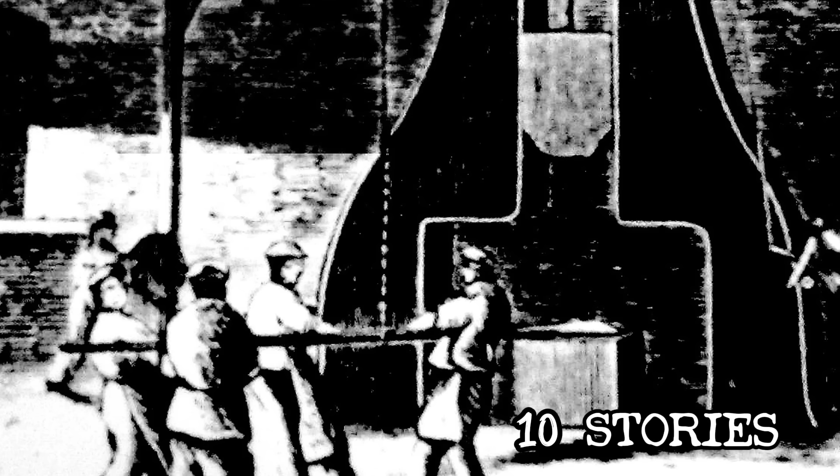Picture a piece of iron the size of a tree trunk, glowing the color of a sunset, lowered onto an anvil the size of a house. Above it, suspended on rails 10 stories tall, hangs a block of solid iron, weighing as much as 6 elephants. A man pulls a lever, the block falls, and for one violent instant, the ground itself flinches.

Nobody inside that building even looks up. It happens too many times an hour to register as anything unusual anymore. Somewhere nearby, a woman is hanging laundry on a line 2 streets from the forge wall. She doesn't look up either when the ground thumps under her feet. She stopped flinching years ago.

Her husband is the one standing inside that building, close enough to the anvil to feel the heat coming off the metal before it even glows. Neither of them would call this normal, exactly. But it's their normal. It's the only normal this town has ever known.

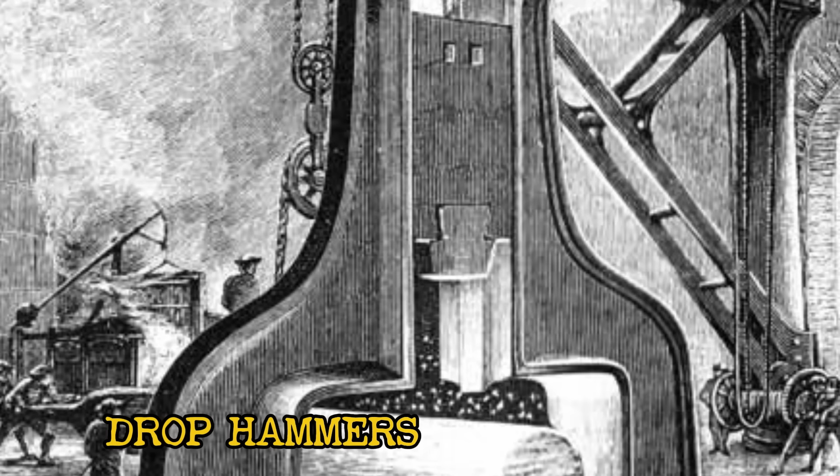For nearly 200 years, machines like this one shaped the steel skeleton of the modern world. The axles under your trains, the crankshafts in your ships, the barrels of your cannons. They were called drop hammers, and they were every bit as dangerous as they sound. This is the story of the men who stood beside that falling iron, day after day, year after year.

Some of them went deaf before they turned 30. Some of them breathed in dust that scarred their lungs for the rest of their lives. Some of them never came home at all. And in towns built around these forges, the ground shook so often that people stopped noticing, until their houses started cracking. It built the modern world.

It is also, quite literally, still rotting men's lungs and ears, in forge buildings that, in some cases, are still running today. Before we're done, you'll understand exactly what that cost looked like, and why so many men paid it without ever being told the price.

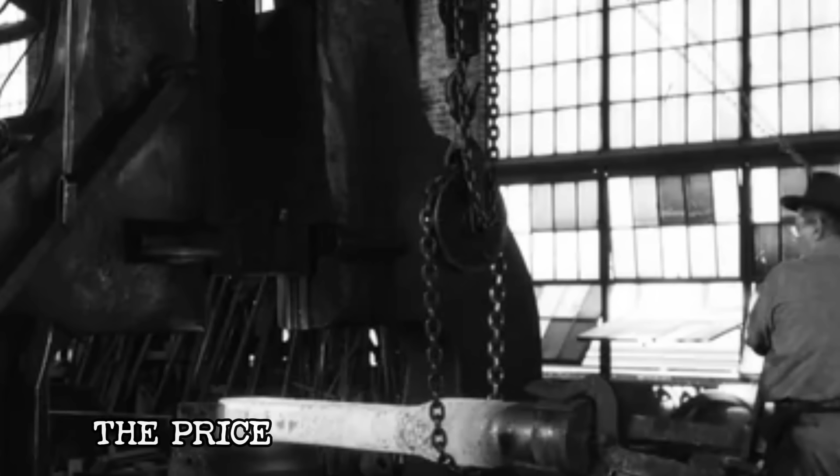Here is the question we're chasing. How did a single falling weight become one of the most dangerous, most essential, and most quietly devastating machines in industrial history? And why are people still paying for it?

We're not just talking about the men who stood next to it either. We're talking about entire towns. Entire neighborhoods built within earshot of a machine that never asked permission to shake their foundations. Keep that in mind as we go, because the damage in this story spreads a lot farther than the factory walls.

To answer that, we have to go back to a problem that nearly stopped the entire industrial revolution in its tracks. By the late 1830s, engineers had a crisis on their hands. Ships were getting bigger, locomotives were getting heavier, and every one of them needed a single piece of metal that nobody on Earth could make: a paddle shaft, a crankshaft, an axle forged from one solid mass of iron, sometimes 30 inches thick.

The old method was a sledgehammer crew, 10, 20 men, swinging by hand, in shifts, for hours, trying to beat a glowing slab of iron into shape before it cooled past working temperature. It was slow, it was inconsistent, and for anything truly massive, it simply did not work. The iron cooled faster than men could hammer it. That was the antagonist, a wall of physics that human muscle could not punch through.

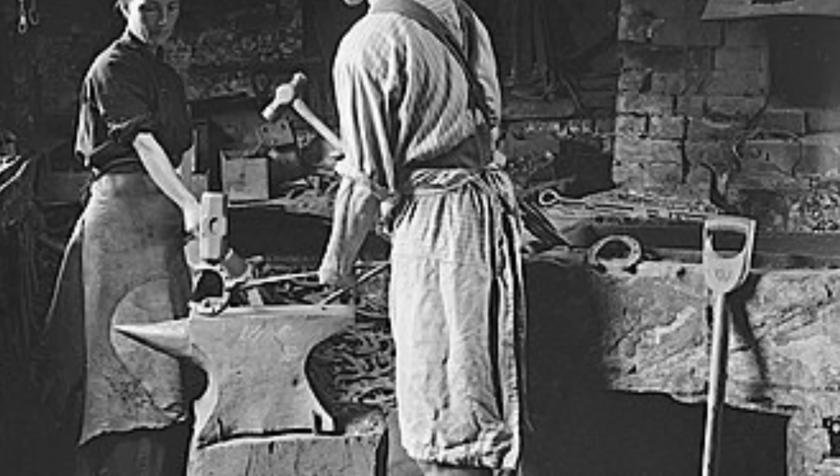Think about what that actually looked like on a foundry floor before this machine existed. A glowing slab of iron, pulled from the furnace, had only a narrow window of time before it cooled too much to shape. During that window, a crew of men swung sledgehammers in rotation, as hard and as fast as they could, racing the clock against the iron's own temperature.

Miss that window, and the entire piece went back into the furnace to be reheated, wasting fuel, wasting hours, wasting money. For a modest axle or a simple tool, that was merely inconvenient. For the kind of massive forgings the new steamships and railways needed, it was nearly impossible.

No crew of men, no matter how strong or well coordinated, could deliver consistent, controlled force to a piece of metal that size before it cooled past working temperature. The bigger the project got, the more obvious it became that human muscle had reached its ceiling.

A Scottish engineer named James Nasmyth ran into that wall directly in 1839. He needed to forge an enormous paddle shaft for a new steamship, and no hammer crew alive could do it. So he sketched something nobody had quite built before: a heavy iron block, lifted by a steam-powered piston, then released to fall under nothing but gravity and engineered weight, straight down onto the workpiece.

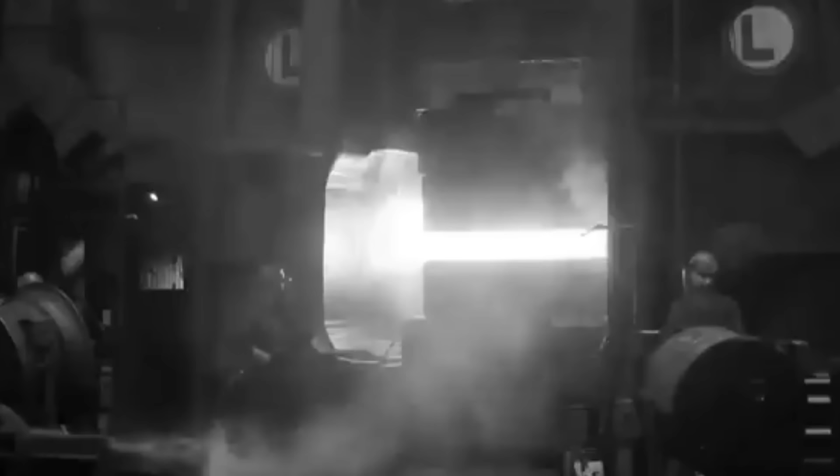The steam only had to lift the block. Gravity supplied the force no crew of men could ever have matched. He wasn't the only one who saw the same wall. Across the water in France, an engineer named François Bourdon had been sketching something almost identical, and when the two men eventually compared notes, it set off a bitter dispute over who deserved the credit.

Both had arrived at the same brutal solution to the same impossible problem, independently, within months of each other. That alone tells you how badly the world needed this machine. What had taken 20 men an entire day now took one machine and a handful of operators an afternoon. This wasn't a modest improvement on the old method. It made the old method obsolete almost overnight.

When the first of these steam hammers went into operation, witnesses described something almost frightening to watch. A tower of iron and steam, taller than a house, slamming down with a sound like a cannon firing, again and again, controlled by one man at a lever. Visiting dignitaries came specifically to watch it work. Foreign royalty toured working foundries just to see the thing strike.

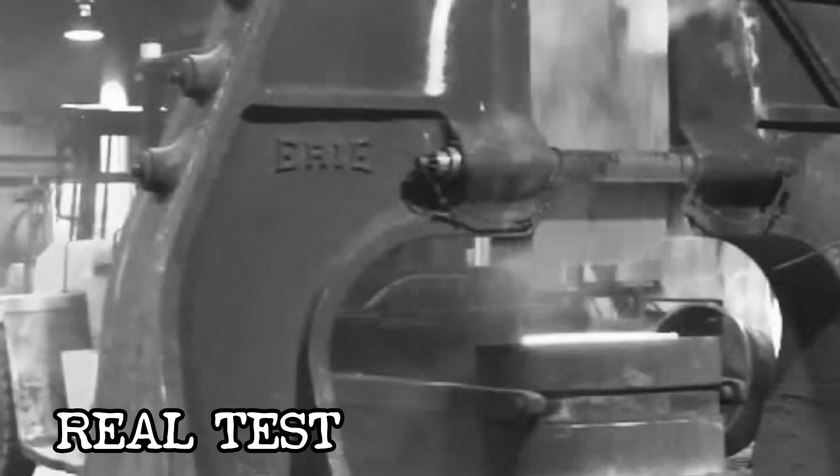It was treated less like a tool and more like a spectacle, the kind of thing kings and dukes asked to see in person. People weren't entirely sure whether to be impressed or afraid. Mostly, they were both. But could it actually work, day after day, without tearing itself apart? That was the real test. Anyone could build something impressive for a single demonstration. Keeping it running, reliably, strike after strike, week after week, was an entirely different problem, and one nobody had solved before.

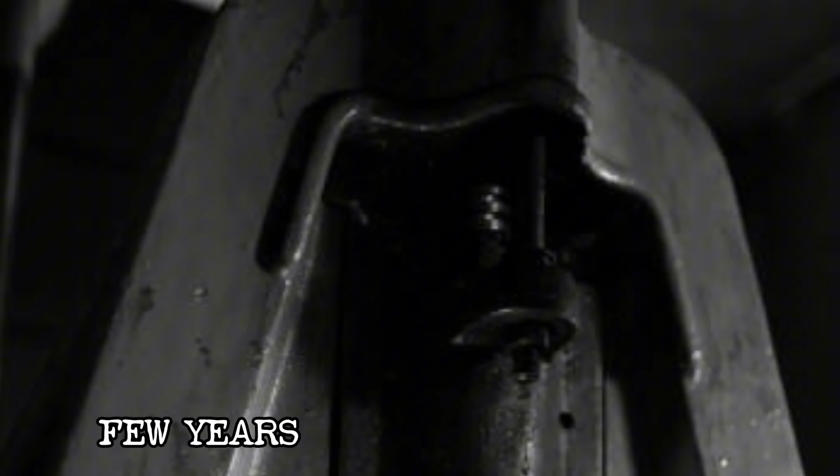The first real tests pushed the machine to its limits almost immediately. Engineers were forging shapes and sizes that had never been attempted before, and there was no guarantee the iron, or the machine, would survive contact. It did, and once it proved itself, demand exploded. Within a few short years, hammers like it were forging the axles, shafts, and gun barrels behind nearly every major engineering project of the industrial age.

Foundries that adopted the new hammer early found themselves with a competitive advantage so large that hesitating meant going out of business. The machine wasn't an upgrade. It was a line in the sand. Adapt, or get left behind by someone who did. What nobody fully reckoned with, in all that excitement, was the question of what it would actually be like to stand next to one of these things for an entire working life.

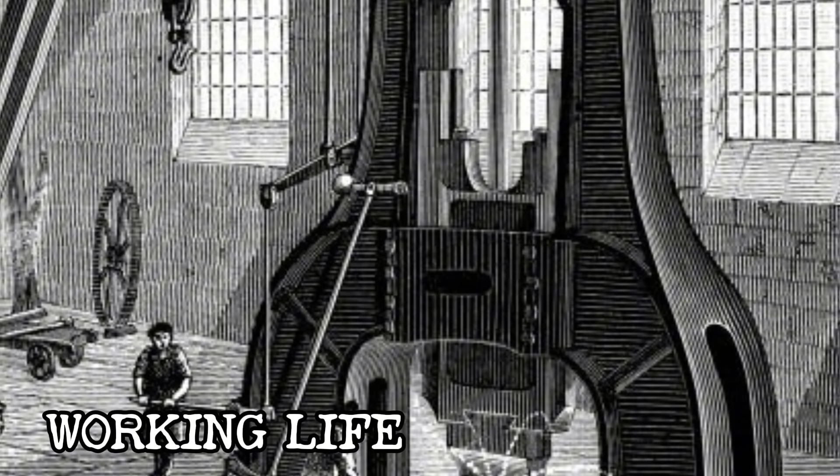The engineers solved the metallurgy. They solved the steam pressure. Nobody in those early years was solving for the men. They'd built the beast. Now came the hard part, because making a tower of falling iron work reliably, every single day, without killing the men standing next to it, that was a completely different kind of war.

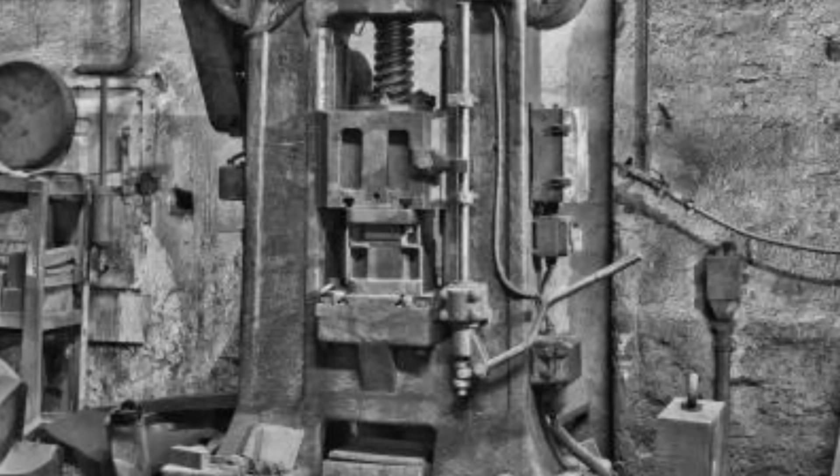90 tons of falling iron. To understand why this machine was so dangerous, you have to understand what it actually was. Strip away the romance, and a drop hammer is a very simple, very brutal idea. Take a heavy mass, lift it high, and let it fall onto something soft and glowing. Gravity does the rest. The largest of these machines, built later in the 19th century, stood taller than a 3-story building and could weigh as much as 90 tons, more than a fully loaded jumbo jet.

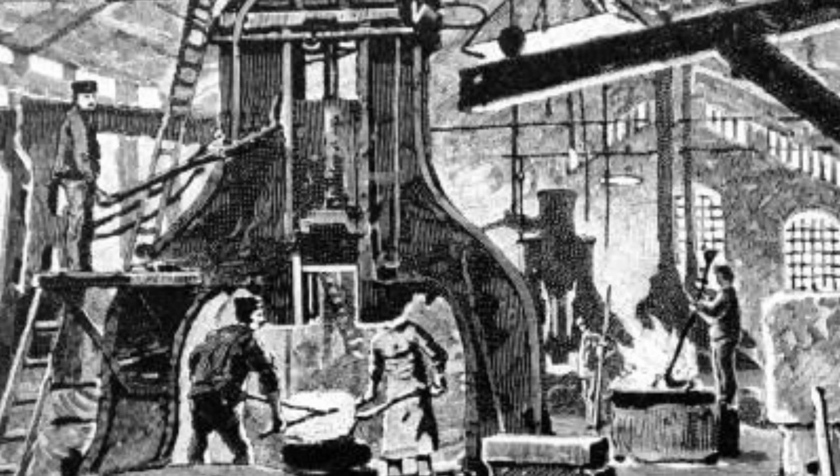The falling weight alone, the part that actually struck the metal, could weigh dozens of tons by itself. When it dropped, it didn't just hit the iron. It hit the ground beneath the whole building, and the shock traveled outward through the earth like a localized earthquake, over and over, sometimes hundreds of times a day. Here is the chain of violence, link by link.

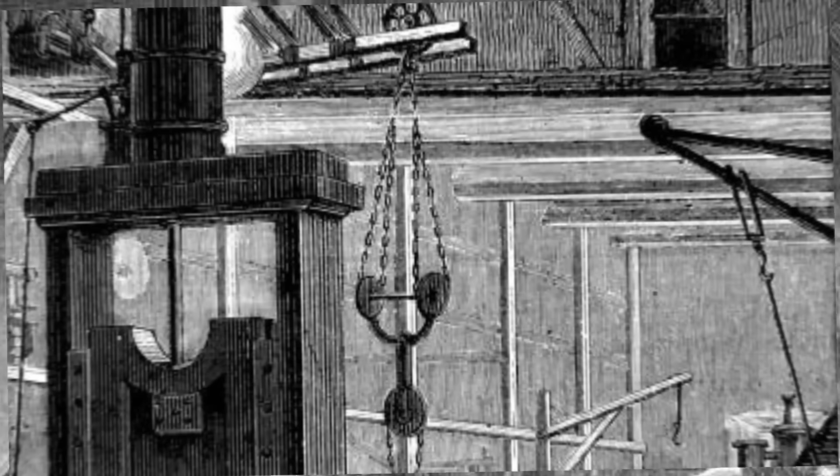Steam pressure forces a piston upward inside a cylinder, dragging the hammer block up with it on guide rails. At the top of the stroke, the operator releases the steam. Gravity takes over. The block falls, faster and faster, until it slams into the glowing workpiece, resting on the anvil below. The impact reshapes the metal in a fraction of a second, and sends a shockwave through the floor, the walls, and every bone in every body standing nearby.

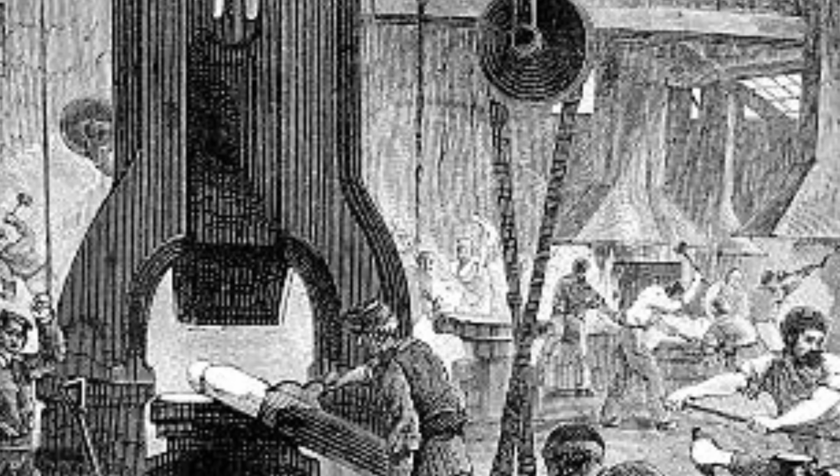But here's what made it genuinely terrifying to operate. The same force that could forge a battleship's crankshaft could just as easily forge a man's hand into the anvil if his timing was off by half a second. There was no clutch. There was no gentle setting. Once that block was released, there was no calling it back.

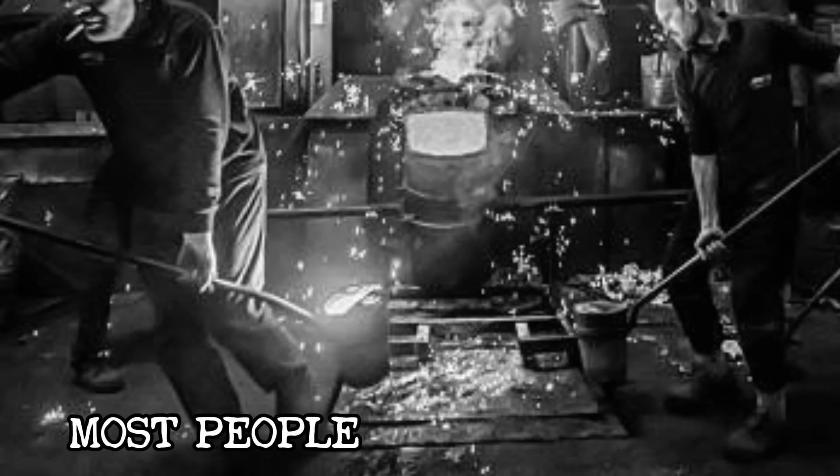The engineers who built bigger and bigger versions of this machine were fighting a problem most people never think about. Where does 90 tons of falling force actually go once it hits the ground? Early hammers shook their own foundations apart. Buildings cracked. Nearby walls developed fractures that spread, year after year, blow after blow.

Engineers had to design entire foundation systems, massive timber and masonry platforms sunk deep into the earth, just to keep the machine from destroying the building it lived in. Get the foundation wrong, and the hammer would eventually shake itself loose, misalign, or tear itself apart from the inside.

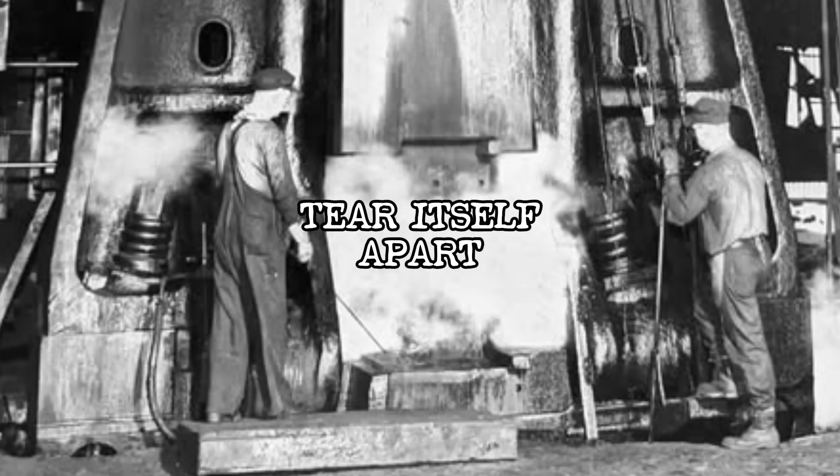So the machine wasn't just a hammer. It was a controlled, repeated, engineered earthquake, contained, barely, inside a brick building, with men standing close enough to feel the heat of the iron and the violence of the strike on every single blow.

How big did these things actually get? Big enough that standing next to one made a grown man feel like a child standing next to a barn. The largest examples weighed roughly as much as a small fleet of city buses stacked together, and when the falling block dropped, the impact could be felt through the floor of buildings well outside the foundry itself.

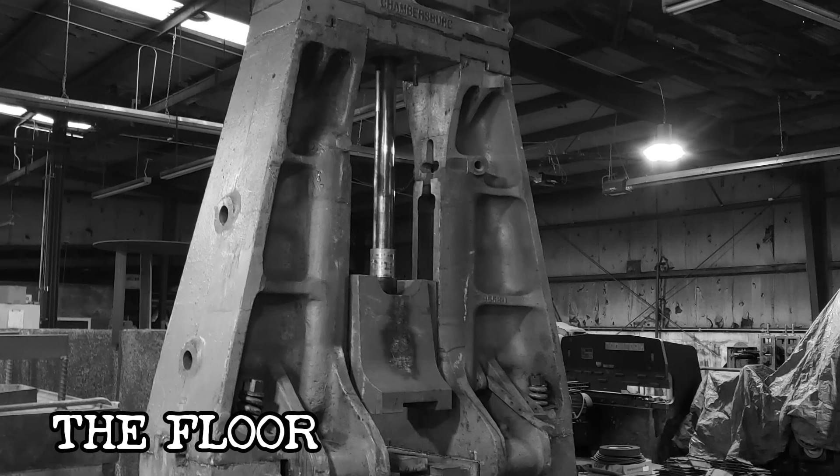Engineers measured the shock the same way seismologists measure tremors, because functionally, that's exactly what it was. A man-made, on-demand, repeating earthquake, scheduled for every working shift. That scale created a problem nobody had faced before. Nothing this massive, falling this fast, had ever needed to be controlled with this much precision. The materials available at the time were being pushed right up against their limits.

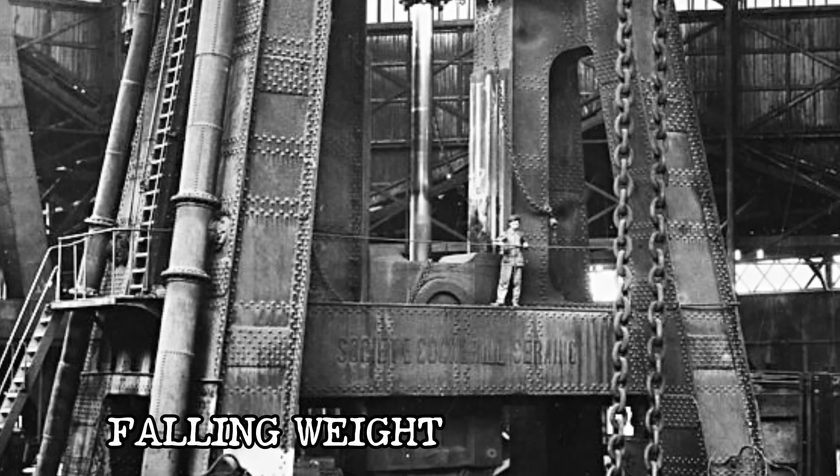Cast iron guide rails had to hold a falling weight perfectly straight, strike after strike, without warping or cracking under repeated shock loading. A kind of fatigue stress that engineers of the era were still learning how to predict. Get the metallurgy wrong, and the hammer itself could fail catastrophically, sending iron fragments flying in every direction.

It's worth pausing on just how much trust that demanded of everyone standing nearby. A man feeding metal into that machine wasn't just trusting the operator's timing. He was trusting that the iron rails above his head, forged by hand using methods still being refined in real time, wouldn't be the thing that failed that day instead of the steel he was shaping.

That kind of trust, repeated thousands of times across a working life, asked something of these men that rarely gets acknowledged in the history books that celebrate the machine's output. And then there was money. Building one of these machines, and the reinforced foundation required to keep it from shaking itself apart, represented an enormous capital investment for any foundry, often more than the value of the building it sat inside.

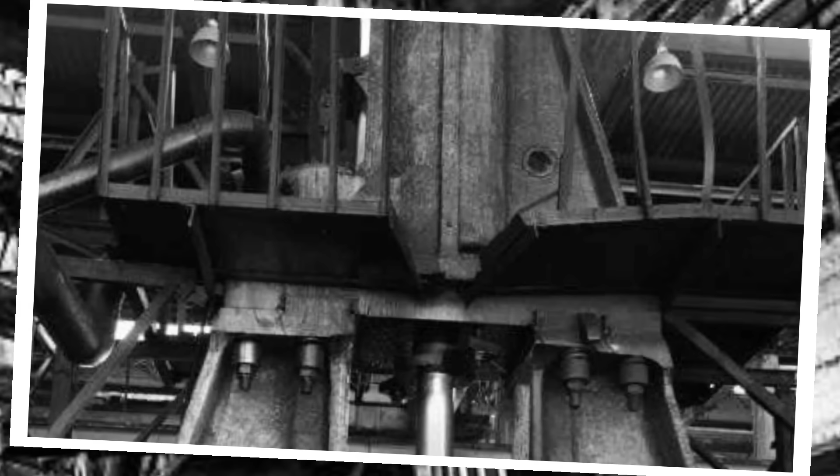Foundries that couldn't afford the investment found themselves unable to compete with the speed and precision of those that could, which meant the pressure to build bigger, faster hammers never really let up. Other countries and competing engineering houses raced to build their own versions, refining the design, scaling it upward, each trying to outbuild the last. Not every attempt succeeded.

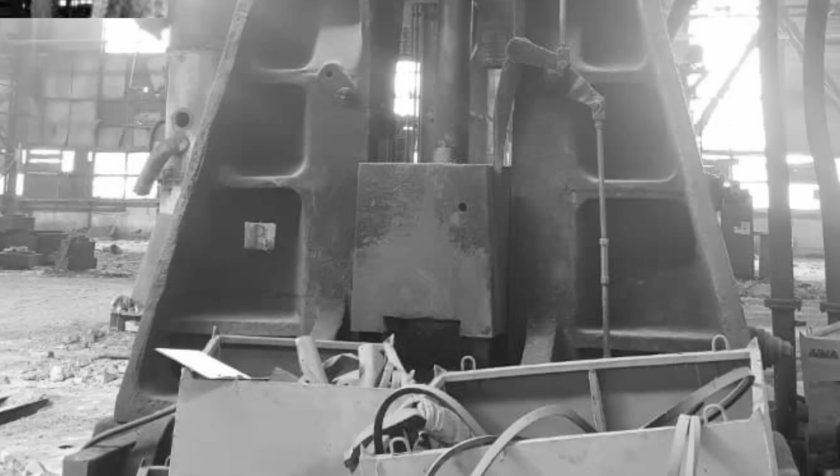Some early competing designs proved unstable under repeated heavy use and had to be abandoned or rebuilt entirely. A quiet reminder that this was still very much an unfinished science, even as the machines kept getting bigger. And that violence didn't stay inside the building. The sound and the shock traveled. We'll come back to exactly how far, because the answer is more unsettling than most people expect.

The gearing, the guide rails, the steam valves, all of it was brilliant engineering. But it had one vulnerability nobody fully respected until the bodies started piling up. It was a machine built around the idea that men would stand right next to it, hour after hour, for their entire working lives. Nobody had asked what that would do to them. The men who lived inside the thunder.

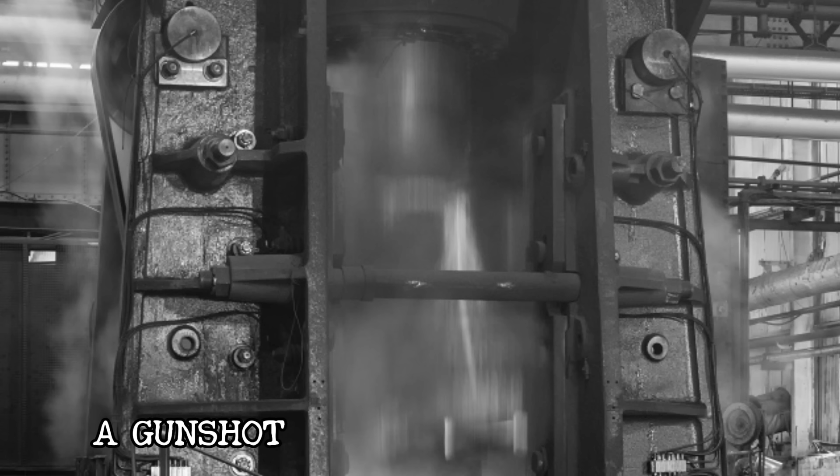If you've never stood near a forging hammer at full operation, here is what it actually sounds like. Not a thud, but a crack, sharp and immediate, like a gunshot fired at point-blank range, repeated every few seconds, for an entire 8 or 10 or 12-hour shift. Imagine a young man on his first week at the anvil. Call him no one in particular, because he was, in truth, thousands of different men across thousands of different forges, each with a different name and the same first week.

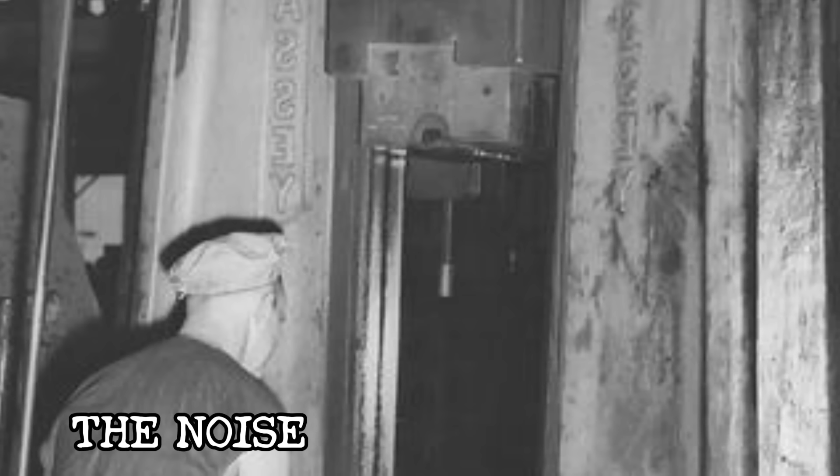He's barely out of his teens. His father worked this same floor before him, and his grandfather before that. He's been told the noise takes getting used to. Nobody told him that getting used to it actually meant his own hearing slowly leaving him, one shift at a time, in a way he wouldn't be able to measure until the damage was already permanent.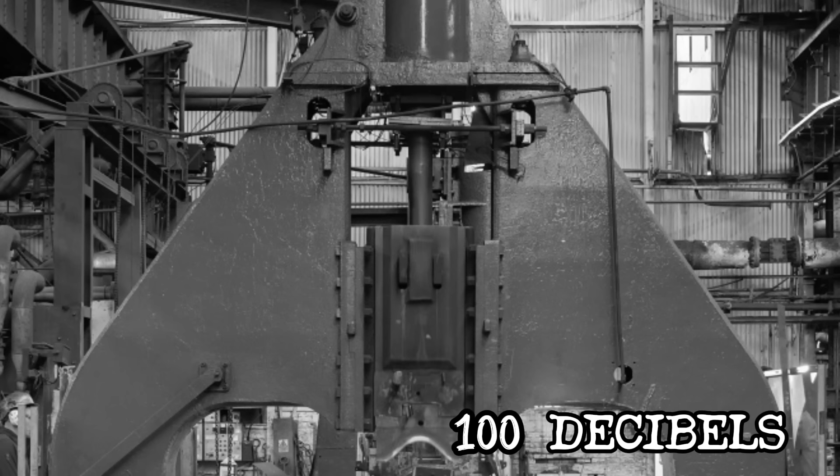Modern measurements at working drop forge plants have recorded peak noise levels from the hammer strike itself reaching as high as 154 decibels, louder than a jet engine at takeoff, measured at close range. Average noise exposure for the men actually running the hammers has been measured well above 100 decibels across a full shift. To put that in perspective, hearing damage can begin at levels above 85 decibels. These men were working at levels 15, 20, even 30 decibels above that, every single day, for years.

So how did they survive it? Mostly, they didn't, not with their hearing intact. Studies of forge workers have found that more than 60% reported hearing loss, and audiometric testing at one hammer forge facility found that more than 80% of workers had measurable, significant hearing damage. The damage didn't arrive all at once. It crept in, blow by blow, year by year, until a man in his 30s found himself unable to hear his own children talking across a dinner table.

But noise wasn't the only thing attacking these men's bodies. The machine reached them through their hands just as forcefully as it reached them through their ears. Hand-arm vibration is what happens when tools and machinery transmit constant, repeated shock directly into a worker's hands and wrists. Around drop hammers, this showed up in tongs operators used to hold red-hot metal steady through every single blow. Vibration traveling up through steel tongs, into fingers, into wrists, blow after blow, thousands of times a shift.

Medical investigations into forge operations have documented workers developing nerve damage in their hands. Numbness, tingling, a slow loss of the fine control needed to do the very job that was destroying them. One documented case involved a hammer operator diagnosed with a debilitating wrist condition directly tied to the repetitive, forceful gripping required to hold tongs steady against the force of the machine. Think about the cruelty baked into that. The skill the job demanded, a steady hand, perfect timing, absolute control, was the exact thing the job slowly took away.

And then there was the air itself. Forging shops were thick with smoke from coal and oil-fired furnaces, fine particulate thrown off by grinding and finishing work, and fumes from the lubricants and compounds used to keep dies from sticking to red-hot steel. Respiratory disease among forge and foundry workers has been documented for more than a century. Men who spent decades breathing shop air, developing chronic lung conditions that showed up only after they'd already given the best years of their working life to the hammer.

Picture the air in one of these buildings, on an ordinary working day. Coal smoke from the furnace heating the next billet of steel. Fine gray dust hanging in the light from grinding the rough edges off the last batch of forgings. A haze of oily smoke rising off the dies every time hot metal pressed down onto them. None of it was ventilated the way we'd expect today. Men breathed all of it, all shift, every shift, for years.

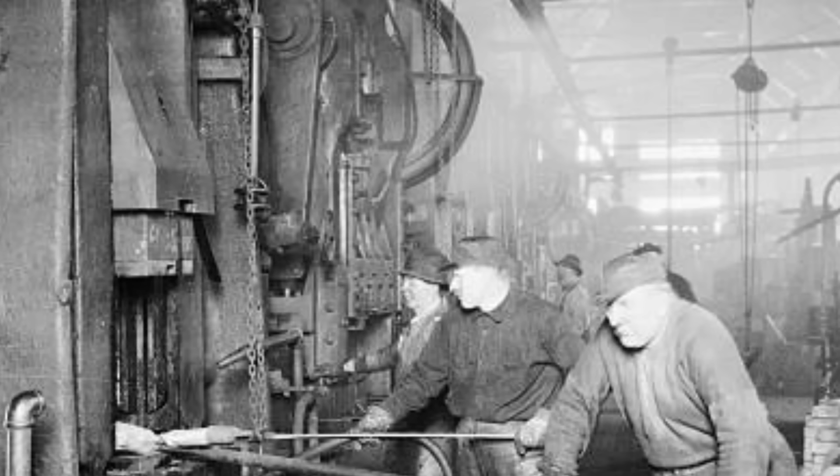Lung disease tied to this kind of chronic exposure didn't announce itself with a dramatic symptom. It crept in as a persistent cough that never quite went away. Then a tightness in the chest. Then, decades later, a diagnosis that connected all of it back to a forge floor the man had left years earlier. But there was a quieter poison in that air too. One with no smell and no warning at all.

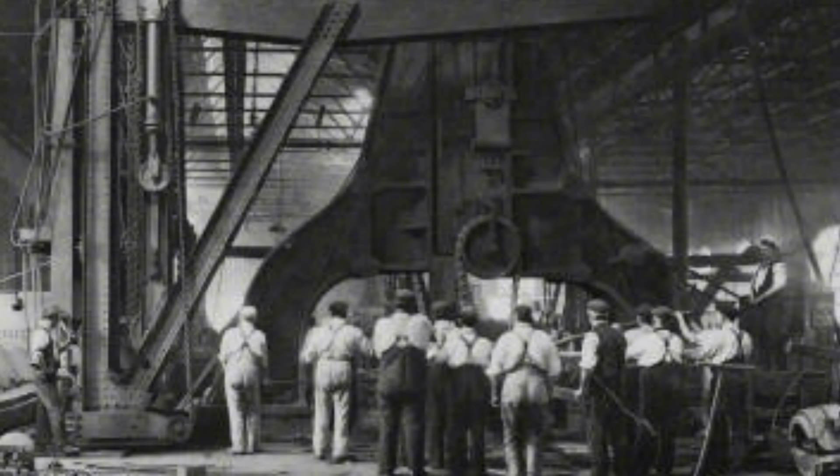Coal and oil-fired furnaces, burning in a poorly ventilated brick building, produce carbon monoxide, a gas so old to industrial workers that it earned its own grim nickname, white damp. It has no color, no smell, no taste. It doesn't announce itself with smoke the way an open flame does. It simply displaces the oxygen a man's blood is trying to carry, quietly, until headaches and dizziness and confusion set in, and a worker has no idea why he suddenly can't think straight, standing 2 feet from the furnace he's tended 100 times before.

In a building already roaring with noise and glare and heat, a slow gas leak was the one danger a man's senses were the least equipped to catch. Our young apprentice at the anvil wouldn't have known the name for what was making him lightheaded on a poorly ventilated afternoon.

He'd have just assumed it was the heat. Sometimes it wasn't. So how did the body cope with all of that at once? The noise hammering the ears, the vibration hammering the hands, the dust and the gas hammering the lungs and the brain. The honest answer is that it didn't, not fully. It endured, for a while, because the alternative was no wage at all. And then, sooner or later, something gave.

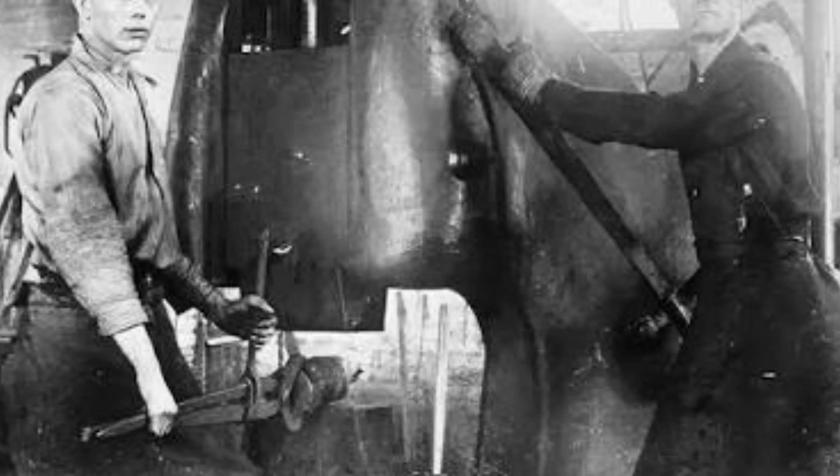Workers gave these machines names, and the names tell you everything. Men who spend their lives next to something that could kill them in half a second don't talk about it gently. They joke about it, darkly, because the alternative is thinking about it too much. Running one of these machines safely required an entire crew working in silent, practiced coordination, because shouting instructions over the noise was often pointless. Could a man even hear a warning shouted from 10 feet away over the crack of a falling hammer? Frequently, no.

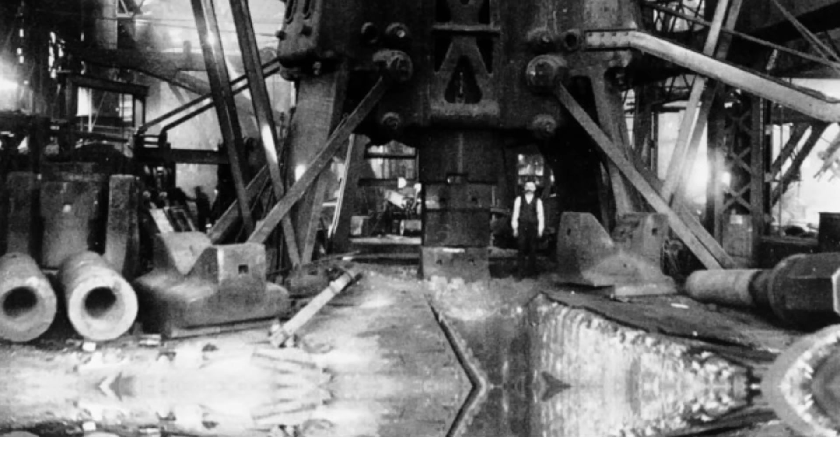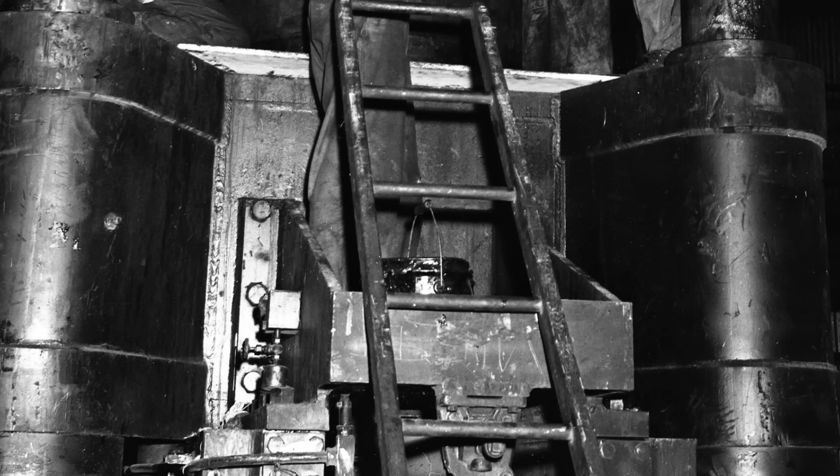Crews developed hand signals, timing learned through repetition rather than verbal instruction, and an almost instinctive sense of when the next blow was coming, because relying on speech in that environment simply wasn't reliable. An operator's entire skill set boiled down to timing and judgment under conditions where a half-second of hesitation or a half-second of impatience could be the difference between a clean strike and a disaster. That kind of expertise took years to develop, and yet it was rarely treated or paid like the highly skilled trade it actually was.

What was the worst job on the floor? Standing at the anvil, holding the tongs, feeding the hammer, closer to the blow than anyone else, trusting your reflexes and the operator's timing with every single strike. One mistimed release, one slip of hot, sweat-slicked tongs. That was the margin these men worked inside, shift after shift, for their entire careers.

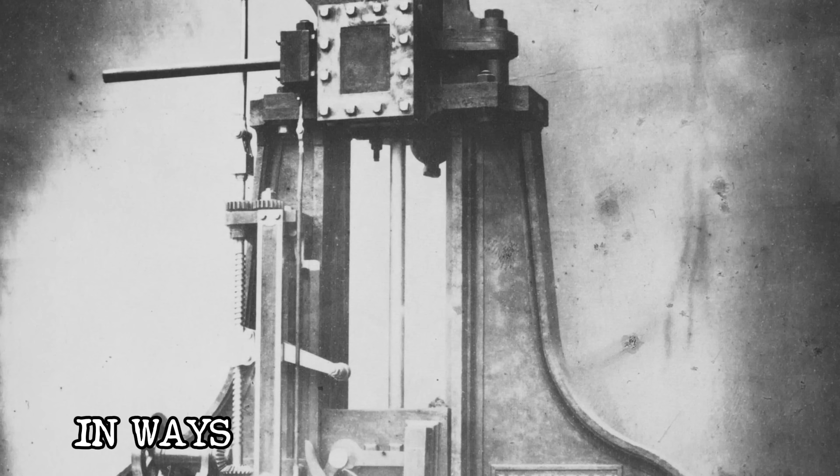It wasn't only the men's bodies that paid for it either. A forge worker who went deaf in his 30s couldn't hear his children calling him from another room. A man whose hand had gone numb from years of vibration couldn't button his own coat without thinking about it. The job didn't just take hours out of these men's lives. It took pieces of the life waiting for them at home, quietly, in ways nobody at the time was tracking on any company ledger.

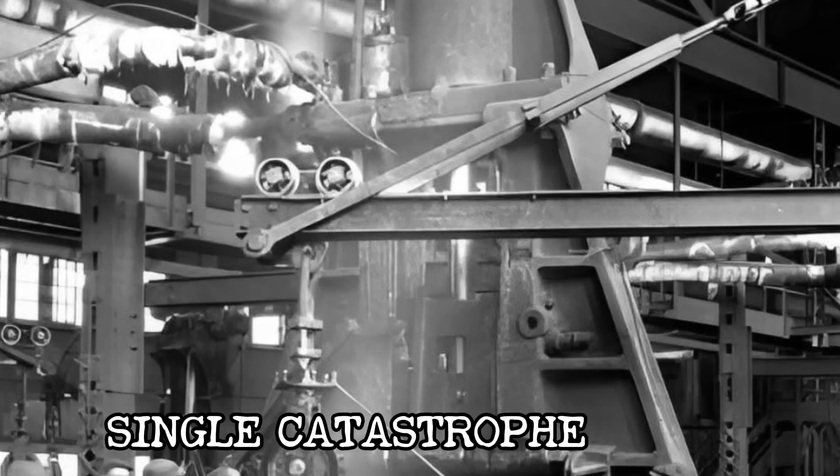For months, for years, they kept it running. The hammer never seemed to tire. The men did. And on the days it all went wrong fast, the silence never came back. Every dangerous machine has a moment that defines it. And for drop hammers, that moment wasn't usually one single catastrophe. It was an accumulation, a staircase of smaller disasters that most people outside the forge never heard about.

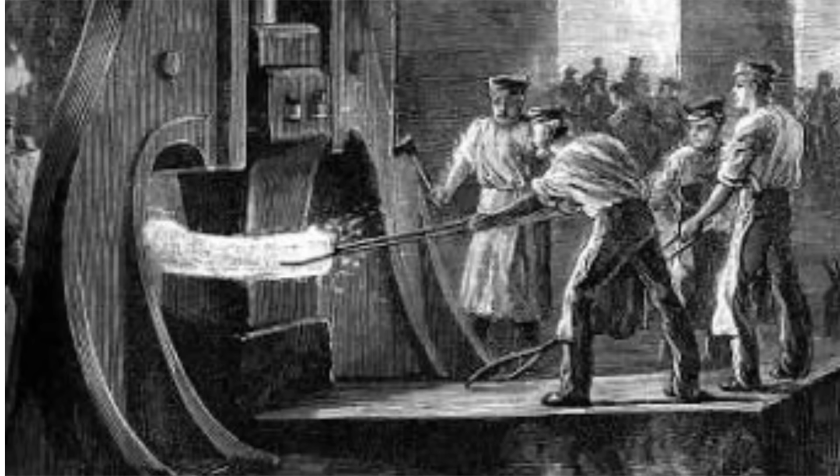It starts small, a near miss. A man's sleeve catches on a guide rail at the worst possible second, and only a fast grab from a coworker saves his arm. It happens again, somewhere else, with someone else, and gets written off as bad luck rather than a warning. Then, it escalates. Records and medical case studies from forge operations describe injuries ranging from crushed fingers to severe hand trauma, the kind that ends in amputation. Injuries directly tied to the unforgiving, split-second timing the machines demanded.

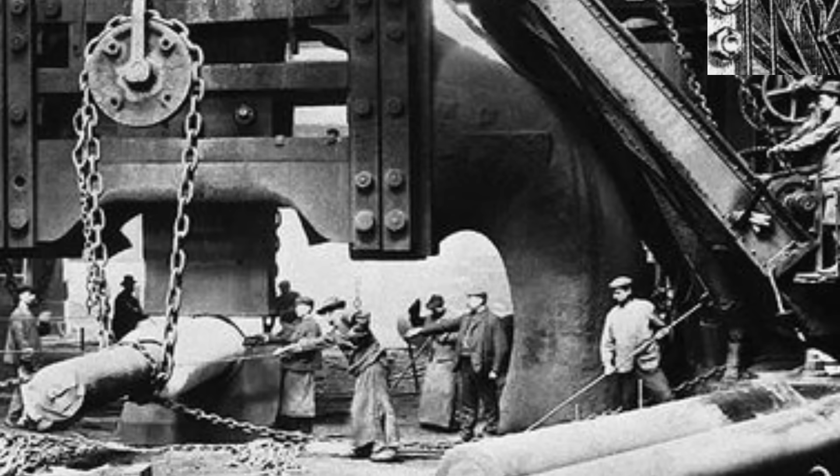The mechanism was almost always the same story told 1,000 different ways. A worker's hand lingered on the workpiece a fraction of a second too long, or the operator released the hammer a fraction of a second too early, and there was no mechanical safeguard standing between that small human error and a catastrophic outcome. Unlike a cut or a burn, this kind of injury offered no warning and no chance to react. The gap between everything being fine and everything being permanently changed was measured in a heartbeat.

Throughout the era of industrial forging, surgeons documented an entire category of trauma, built almost entirely around machines like this one. Crushing injuries to hands caught between dies, between hammer and anvil, in the half-second window where a worker's timing failed and the machines did not.

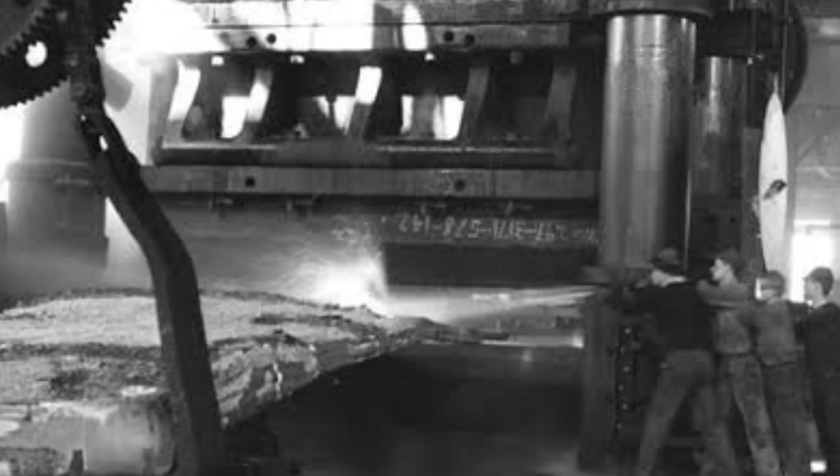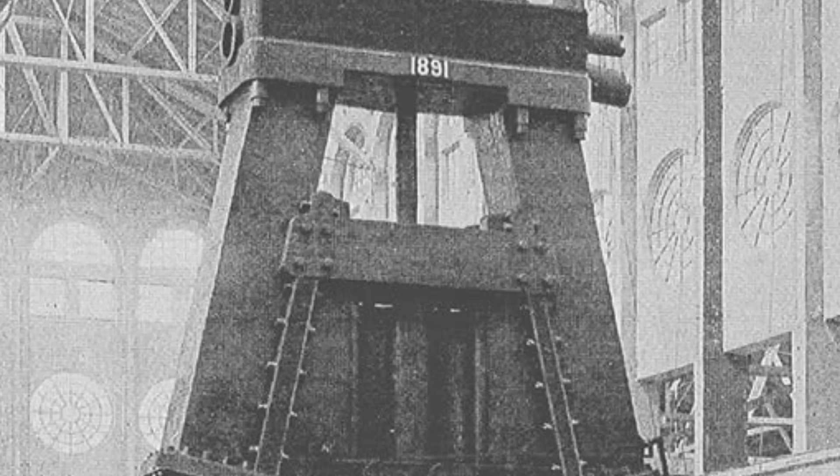In the 19th century, before modern anesthesia and antiseptic technique were standard, an industrial crush injury severe enough to require amputation carried a real risk of death from the surgery itself, not just the original accident. A man could survive the hammer and still lose his life to the infection that followed the operation meant to save him. Could they save him in those cases where the injury was severe enough? Sometimes. Often the best a surgeon could do was stop the bleeding and remove what could not be repaired, and hope the patient's body could withstand the shock of the procedure itself.

A crushed hand wasn't just an injury. For a man whose entire livelihood depended on physical labor, it was frequently the end of his career and the beginning of a much harder, much poorer chapter of his life.

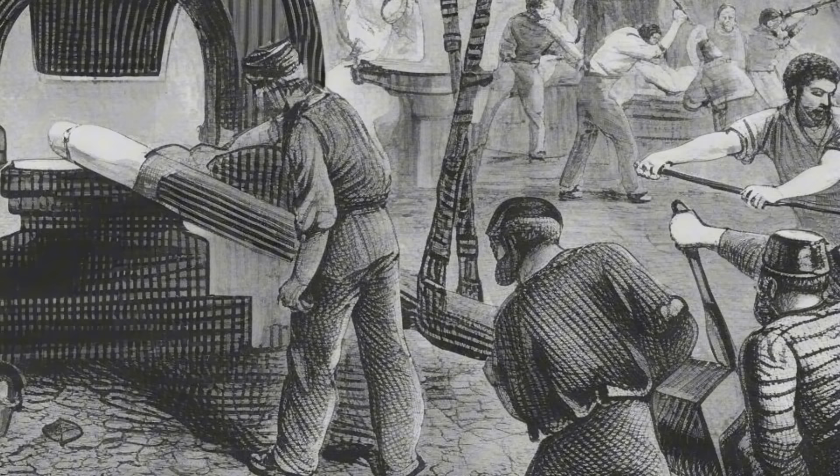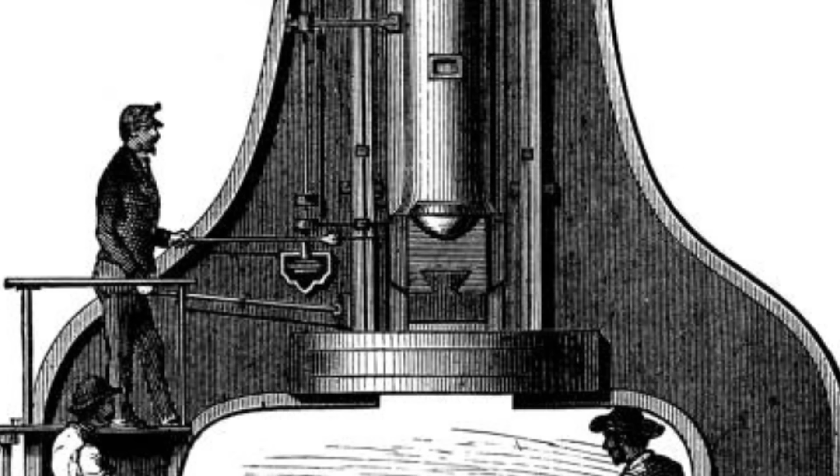And then there's the damage that doesn't show up as a single dramatic headline at all. The damage that simply accumulates, year after year, until a man in his 40s can no longer hear a conversation in a quiet room, or can no longer make a fist with his dominant hand. There was no single newspaper headline for that kind of injury. No dramatic accident report, just a slow, silent toll that took decades to fully reveal itself, and that, for many of these men, never appeared on any safety log at all.

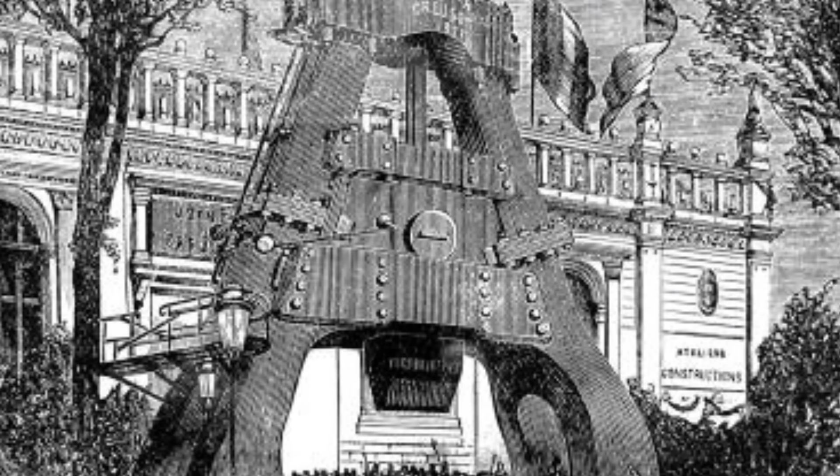Go back to that young man we imagined at the anvil in his first week. Fast forward 20 years, and he's not young anymore. He's the senior man on the floor now, the one new hires watch to learn the timing. He still loves the work, in the strange, stubborn way men love things that have taken pieces of them. But he leans in close when his wife talks to him at dinner, because he can't quite catch every word the way he used to. His right hand goes numb sometimes in the cold, fingers refusing to fully close around a coffee cup.

He doesn't think of any of this as an injury. He thinks of it as just what the job costs, the way every job costs something. Nobody at the forge ever sat him down and told him the bill would come due this way. It simply did, a little at a time, until one day he looked up and realized how much of himself the floor had quietly kept.

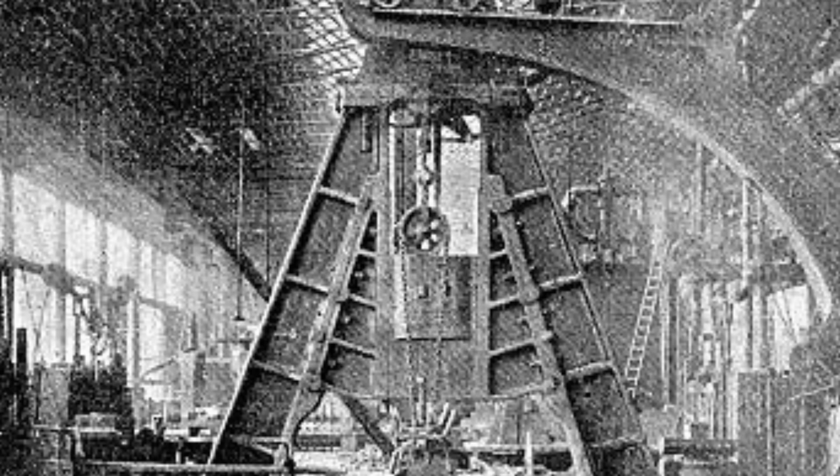That's the particular cruelty of this machine's danger. A boiler explosion makes headlines. A severed hand makes headlines. But a man losing 60% of his hearing over 20 years of standing next to a forging hammer? That happens so slowly, it barely registers as an accident at all, even though the hammer caused it just as surely as if it had struck him directly.

And it wasn't only the men inside the building who paid. Drop hammers, by their very nature, send their violence outward. The shock waves they generate travel through the ground for considerable distances, and the noise carries for miles. Historical accounts describe steam hammers loud enough to be heard across entire towns, audible streets away from the foundry that housed them.

People living near these forges didn't choose to be inside the blast radius of a machine they didn't operate, weren't paid by, and had no say in regulating. But they lived with the same percussive shock, the same relentless noise, day after day, simply because they happened to live near the works. In forge towns, this wasn't a rare inconvenience. It was the rhythm of daily life.

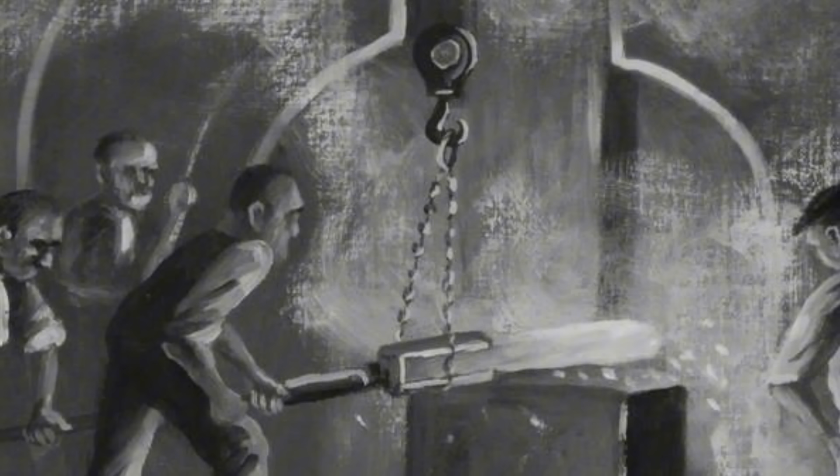Houses near the largest hammers reported cracking plaster and shifting foundations from the accumulated, repeated shock of decades of strikes, vibration powerful enough to be measured and engineered against inside the very buildings that housed the hammers, let alone the structures next door that had no such protection at all. The same force that engineers fought to contain inside reinforced foundations was, quite literally, leaking out into the homes of people who had nothing to do with the forge at all.

A family in a house 2 streets over from the forge didn't sign up for an industrial career. They didn't get a wage for what they put up with. But their windows rattled on the same schedule as the hammer's strikes. Their children grew up associating the cannon crack of falling iron with something as ordinary as a clock chiming. Sleep, conversation, the quiet of an ordinary evening. All of it was negotiated around a machine they had no say in, owned by people they likely never met, running on a schedule set entirely by someone else's production targets.

Picture a mother trying to settle an infant to sleep in a house that close to the forge wall. She learns quickly that there's no fighting the schedule. The hammer doesn't pause for a crying baby, so she adapts instead. Feeding, rocking, soothing, all of it timed loosely around the rhythm of strikes she's long since stopped consciously hearing. Visitors to the house notice it immediately, flinching at every crack. She doesn't react at all anymore. Her nervous system has simply adjusted to a noise she never agreed to live next to in the first place.

This is the part of the story that rarely gets told. The cost of these machines wasn't contained to a factory floor.

It radiated outward, into entire communities, in the form of noise nobody could escape, and vibration nobody had agreed to live with. Pollution from coal and oil-fired furnaces drifted into nearby neighborhoods as a matter of routine, decade after decade, long before anyone seriously measured what it was doing to the people breathing it. Smoke that blackened the men's lungs inside the forge didn't stop at the factory wall either. It settled on washing lines, crept through windows, and coated the same neighborhoods that absorbed the shockwaves.

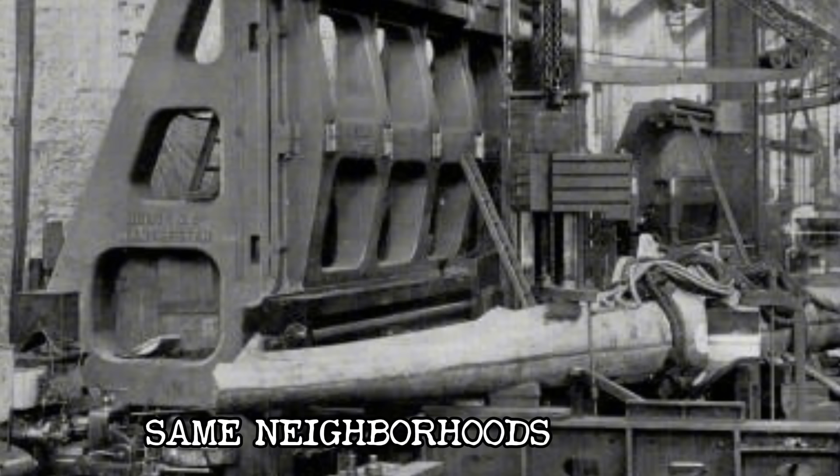What did the people living nearby actually do about it? In some cases, remarkably little, because the forge was also the reason the town existed in the first place. It paid the wages that built the houses being shaken. Complaining too loudly about the noise risked complaining about your own paycheck, or your neighbors, or your landlords. That tension, between needing the forge and suffering because of it, is its own quiet tragedy, one that rarely made it into any official record at all.

It's worth sitting with that tension for a moment, because it explains why this kind of harm went on for as long as it did. A forge town wasn't just a collection of people who happened to live near a factory. It was an entire economy built around the assumption that the shaking, the noise, and the smoke were simply the cost of having work at all.

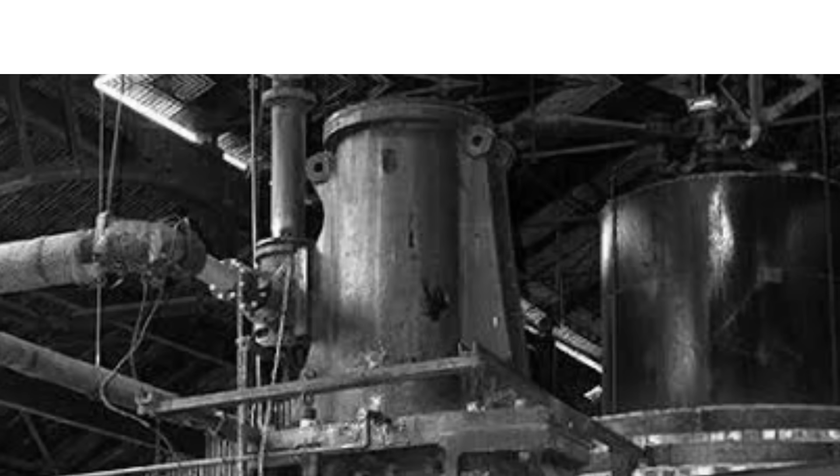Children grew up there. They went to school there, played in streets that rattled on schedule, and many of them eventually walked through the same forge doors their fathers had, because it was the only steady wage the town had ever offered. The danger wasn't hidden from them. It was simply normalized, generation after generation, until it stopped looking like danger at all and started looking like just the way things were. Regulatory response, when it eventually came, arrived agonizingly slowly.

Occupational noise limits weren't seriously enforced in many forging operations until well into the latter half of the 20th century. Investigations conducted by health and safety agencies in more recent decades, at forge plants that had, in some cases, been operating for more than 100 years, continued to find worker noise exposures exceeding safe limits, hand-arm vibration levels above recommended thresholds, and audiometric records showing measurable hearing loss across the workforce.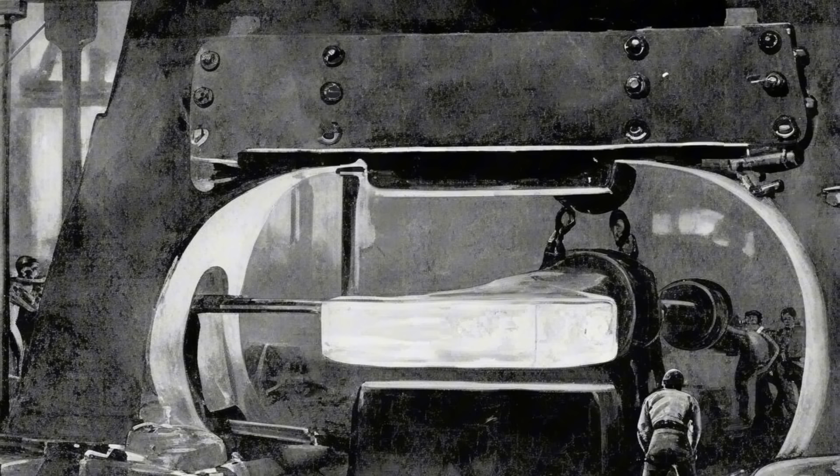In other words, this isn't purely a story about the distant past. Some of these exact hazards were being documented and confirmed at working forge plants within the last few decades, meaning, in some very real sense, men were still paying this price long after the world had the knowledge and the tools to stop it. And what about the surrounding neighborhoods, decades later?

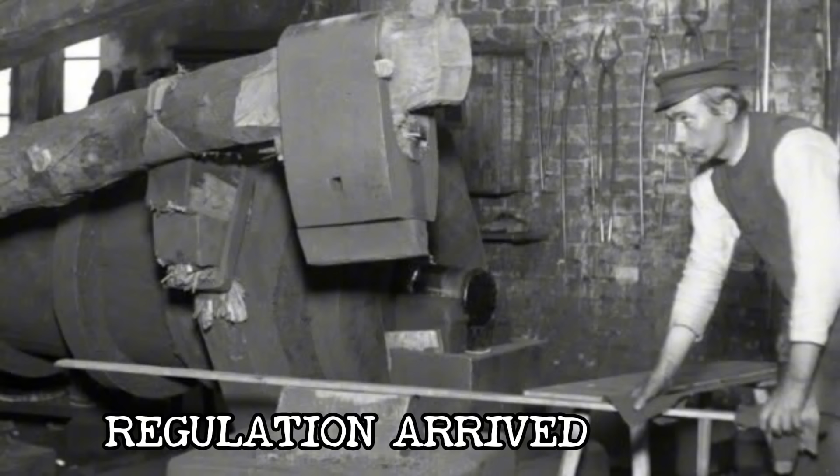Environmental and noise regulation eventually caught up to industrial forging in most developed countries, restricting hours of operation, mandating sound barriers, and in some cases, pushing the loudest operations out of residential areas entirely. But that protection came generations after the first families had already lived their entire lives inside the blast radius of someone else's machine. The regulation arrived. The damage it was meant to prevent had, for many of those families, already been done.

The dead and the deafened were never given a parade. The hammer kept running. The town kept shaking. But somewhere in there, the question everyone eventually had to ask out loud was this: was the steel really worth what it cost the men standing next to it? The buildings that still remember.

So what did all of this actually buy us? Quite simply, the modern industrial world. Drop hammers and their steam-powered descendants forged the crankshafts of the ships that carried global trade, the axles beneath the railroads that connected continents, the gun barrels and armor plate that decided wars, and the heavy machine components that made the rest of the Industrial Revolution possible.

Before these machines existed, there was a hard physical ceiling on how large and how strong a single forged piece of metal could be. After them, that ceiling simply disappeared. Entire categories of engineering, bigger ships, bigger engines, bigger bridges, became possible because somewhere, a falling weight the size of a small building was driving steel into shape with a force no group of men could ever match by hand.

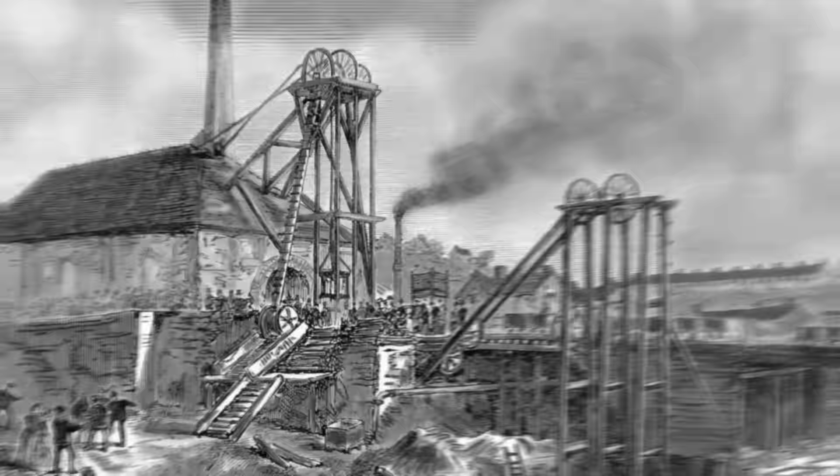But the buildings that housed these machines tell their own story, separate from the steel they produced. Many of the original forge halls built around steam hammers are still standing, more than a century later, some preserved as monuments to the engineers who designed them, some converted into museums, and remarkably, some still operating today, the descendants of the original machines having been replaced gradually with hydraulic and mechanical presses that could deliver controlled force without quite as much raw, gravity-driven violence.

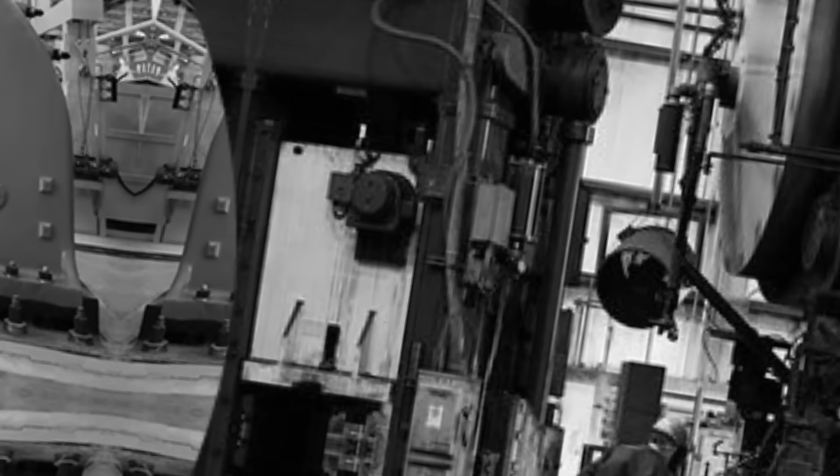What ultimately pushed the original steam hammer toward retirement wasn't safety reform, it was precision. Hydraulic and mechanical presses offered something a falling weight never could: consistent, measurable, repeatable force, blow after blow, without the wild variability of pure gravity.

As manufacturing demanded tighter tolerances, the raw, brute force drop hammer gradually gave way to machines that could be controlled with far greater accuracy. Though notably, many of those replacement machines inherited the very same noise and vibration hazards that had plagued their predecessors, simply in a different mechanical form. The danger didn't disappear, it evolved.

And that's really the uncomfortable truth sitting underneath this entire story. We tend to talk about industrial machines like this one in the past tense, as if the danger belongs entirely to old photographs and sepia-toned newsreels. But forge operators today, in plants that have been running continuously for over a century, are still being measured for noise exposures above safe limits.

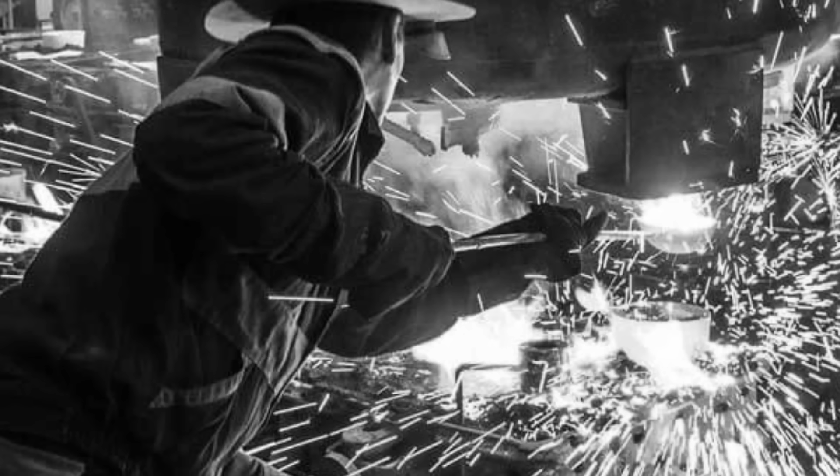Workers today are still showing up on audiometric tests with measurable hearing loss tied directly to time spent standing next to a hammer. This damage is still happening right now, quietly, inside working buildings that most of us will never see the inside of. What does that mean for the towns built around these forges? Many of them still exist, still shaped by the industry that built them, even where the original steam hammers have long since been retired or replaced.

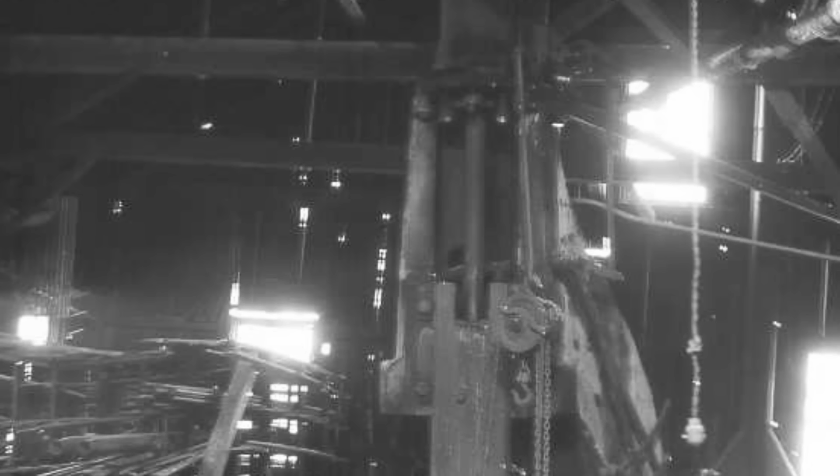The houses that once cracked under the shock of falling iron are still standing, in some cases owned by descendants of the same families who lived through the worst of it. The forge is quieter now in most places, but the relationship between a town and the machine that built it, that dependence, that quiet endurance, never fully went away. It just changed shape, the same way the hammer itself eventually did.

That's the real legacy of the drop hammer, not just the ships and the railroads and the bridges, as real and as important as they were, but a permanent, ongoing reminder that some of the machines that built the modern world never stopped extracting their toll from the people who ran them, and from the people who simply happened to live close enough to hear it.

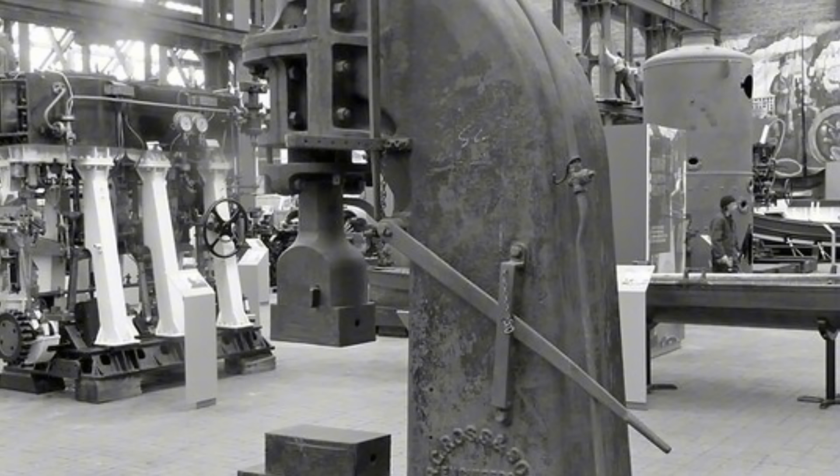The shaking faded from public memory. It never fully faded from the bodies of the men who stood closest to it, or from the foundations of the houses that absorbed it for decades, without ever being asked. We look at a drop hammer today, silent now, in most cases, parked behind glass in a museum or a preserved foundry, and we see a monument to engineering ambition.

But it's worth remembering what that monument actually cost. Ears that never fully recovered, hands that lost their grip years before they should have, lungs that carried shop air for decades, and entire neighborhoods that lived inside the shockwave of someone else's progress without ever being asked.

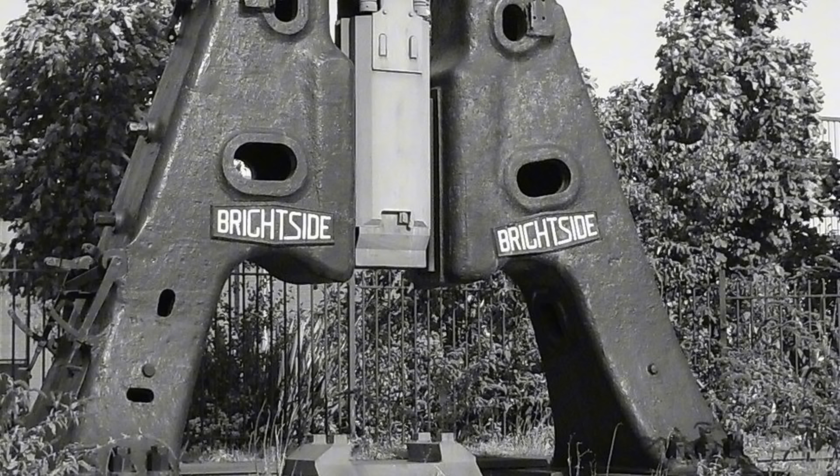Stand in front of one of these preserved hammers today, and it's almost impossible to imagine the noise that once came out of it, the way the floor used to move, the way an entire street used to brace, without quite realizing it, every time that block of iron fell. The silence is the strangest part.

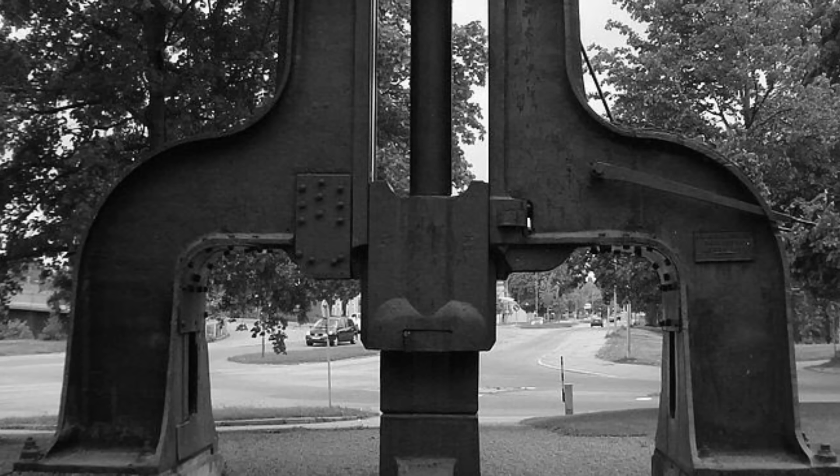These machines were built to be loud, built to be felt, built to announce themselves through brick walls and city blocks. Seeing one standing still, roped off, captioned with a small plaque, is almost a kind of disguise. It hides exactly how violent the ordinary working day around it used to be.

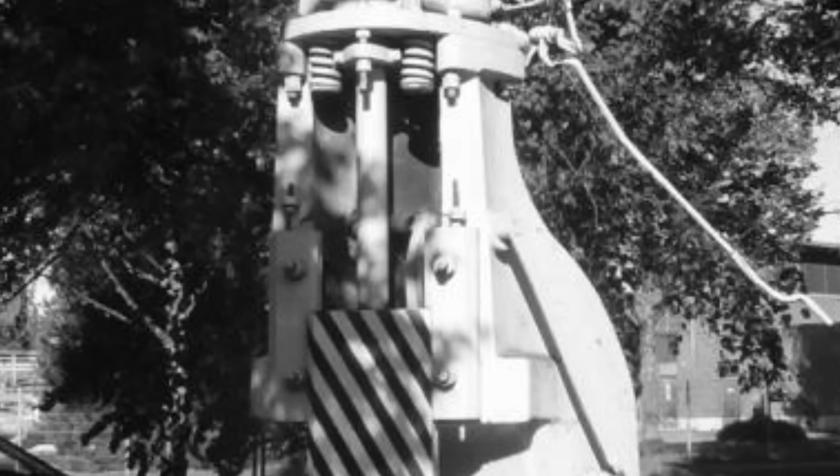Somewhere, in some town, there's likely still a man, older now, retired from a floor that doesn't exist in the same form anymore, who still leans in a little too close when someone speaks softly to him. He'll tell you the hammer gave him a trade, a paycheck, a sense of purpose that carried his family through decades most people only read about in history books.

He'll also tell you, if you ask him plainly enough, exactly what it took from him in return. He won't say it bitterly. He'll just say it plainly, the way men who've made peace with a hard bargain tend to talk about it.

That's the whole story, really, distilled down into one ordinary retired man and one ordinary retired machine, each of them having given everything they had to the work, and each of them a great deal quieter now than they used to be. They don't run the old ones much anymore, but in some forge buildings the thunder never really stopped.

It just got a little quieter and a little easier to ignore. Progress had a price. A great many men, and the towns built up around them, paid it without ever quite being told the bill was coming.